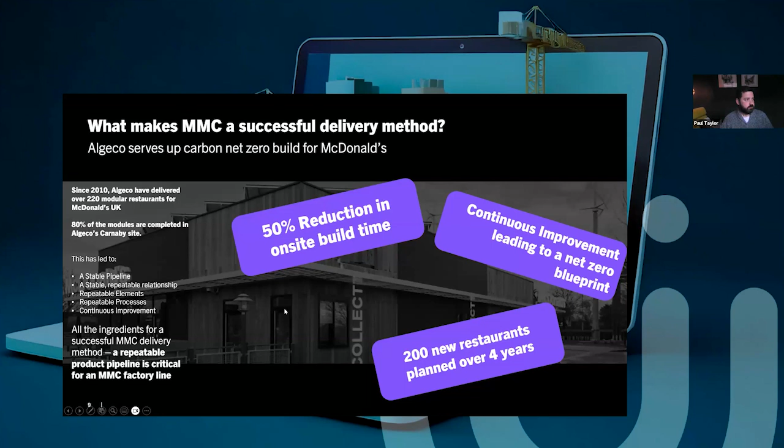So if that's the case, how can platforms help with that? Obviously I've been talking about platforms being a balance of repeatability and variability. If we look at that last example, repeatability is really important for MMC - repeatability in the factory line, in delivery methods. So that's how the product platform can help scale MMC.

So as you look at these three domains we talked about before - if you look at the demand domain, you're really trying to stabilize your pipeline and developing those stable relationships with clients and the supply chain. So you get a good grounding and foundation for that repeatable delivery.

When it comes to that develop section, when you're looking at the programmatic implementation and not just projects themselves, you can look at the repeatability across them and develop something that suits the factory line for MMC - development of repeatable solutions that can enable the successful use of a factory line.

And then we come to deploying projects as well - deploying projects that are configured with those repeatable MMC elements in mind. So if you've done the demand domain, undertaken that information to understand the pipeline, and developed a programmatic approach, when you deploy it your factory line will already be set up for those repeatable elements and can meet what the client wants. It can be amalgamated with those variable elements that are specific project-based client requirements, if that makes sense.

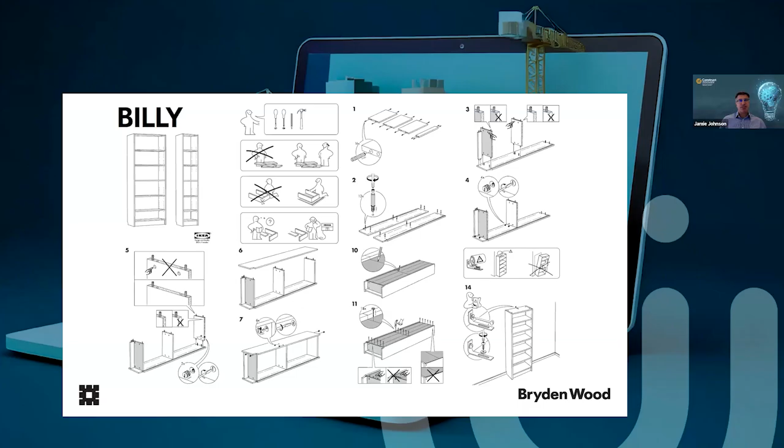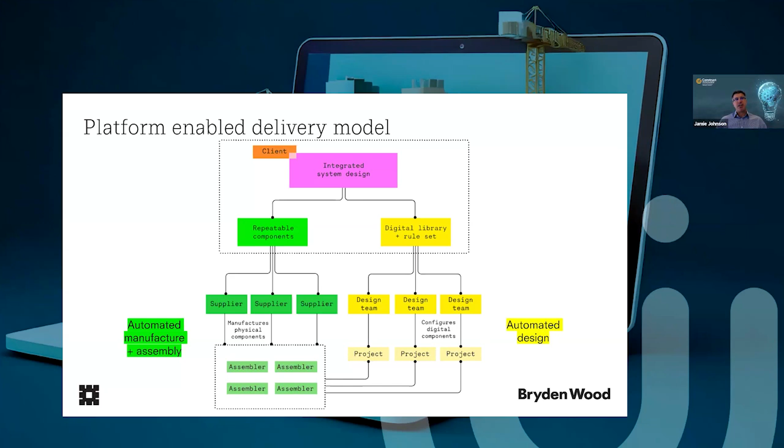So this is how we describe it. We say if you had a coordinated set of components and interfaces and processes, on the right-hand side, you could codify those quite easily as a digital library with configuration rules. Design teams could be configuring projects, so not designing a school from scratch each time, but configuring standardized solutions around classrooms and corridors, or Hospital 2.0 wards, inpatient things, as Paul's talked about. So you think of design as a configuration of standardized components with the project specifics on top. And on the left-hand side, you think about manufacture of standardized components assembled in a particular way, exactly as IKEA's done. That opens the doors to economies of scale, but also potentially automation in design and in assembly, which I'll talk about a bit later.

So this is why you do it. You do exactly what manufacturing's done, incremental gains, as Paul's talked about. You get a component, you optimize it, and you make it more and more efficient. You get economies of scale by doing it again and again. You get processes that continually improve. Whereas construction currently deals in constant reinvention, manufacturing is continual improvement. That's where we want to get.

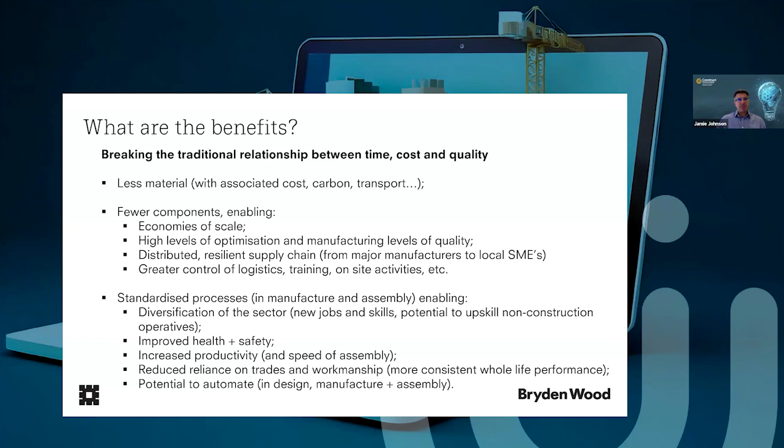That's how you get those incremental gains, and that's how you start getting into those 40, 50, 60% improvements in time and delivery, etc. So we've been working on this for a long time. We've now developed a kit of parts, but not just the components, also the tools, the workflows, and ways of putting these things together.

We would use exactly the same components across all of these sectors. By looking for commonality, we found there's much more typological similarity between education, resi, healthcare, etc. than people have traditionally thought. So we've been developing solutions which are good for all of these sectors. Where I'm going to show you an office deployment, you can imagine this deployed across the government estate, or certainly on large portions of it.

When Paul and I were working at the hub together, we did a piece of work looking across the government estate. We found that about 70% of the things that government builds could be delivered with the same kit of parts. So the potential scale of deployment is vast. This maybe explains that principle.

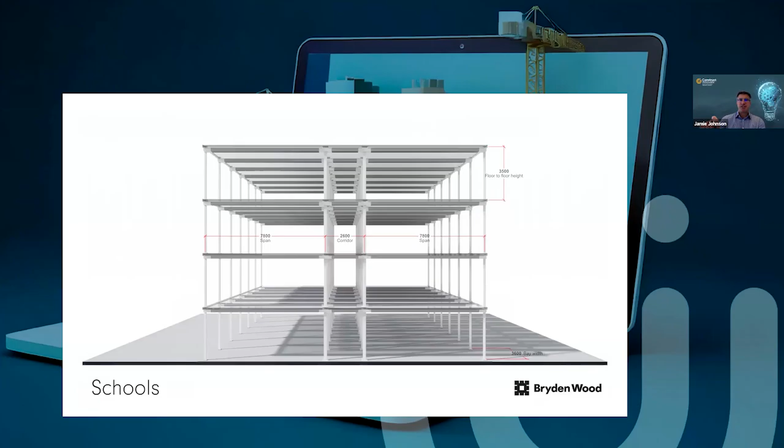So if you imagine the interfaces, like IKEA, between the columns and the beams in this instance are the same each time, you can imagine to an operative on site and to a manufacturer of the components, you're just making the same thing, carrying out the same process time and time again. Just by cutting the beam to a different length and the column to a different length, suddenly you get the same kit of parts deployed to multiple different sectors. And then the variability becomes the facade that you bolt on or the MEP equipment you put in place.

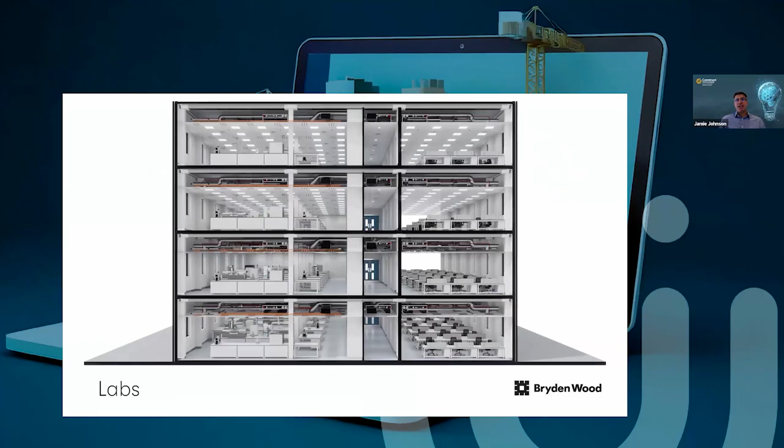One of the things we found through the government analysis work was that story heights were about a person height plus a bit. At that sort of height, you can get natural light about 8 meters into a building. That's why classrooms, hospital wards, and apartments are about 8 meters deep. So that typology of 8 meter deep space, central corridor, 8 meter deep space is incredibly common across sectors. If you develop solutions that do that very well, it's easy to imagine how just by tweaking some of the components, you can start building completely different sectors.

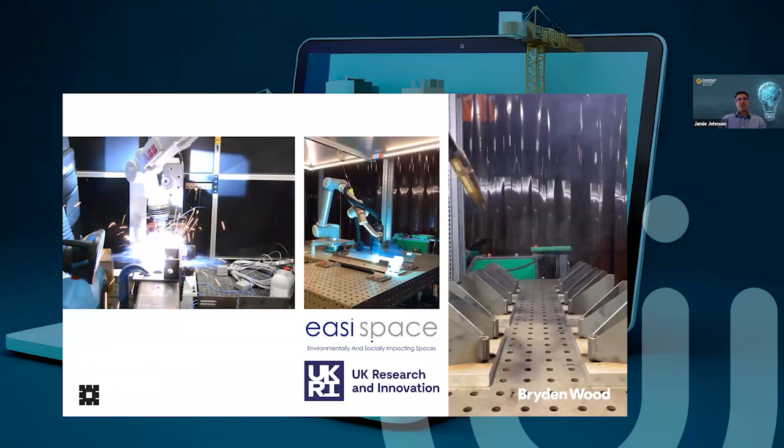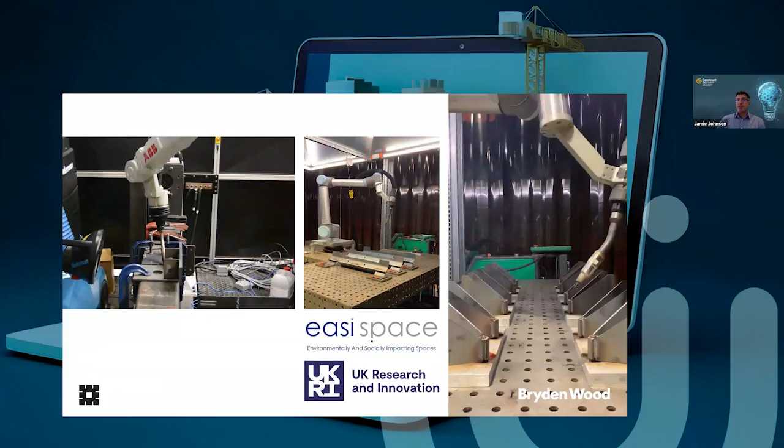What that then gets you into is once you have standard components and you're looking at massive repeatability, you can start to automate their manufacture. This was taking one of the sets of components we developed because we were delivering lots of them, so we could use robots to make them. For some components, we didn't even draw them, the file goes straight from our desktops to a robot that makes the components. They are then millimeter, sub-millimeter perfect. And suddenly you're not talking about construction tolerances, you're talking about manufacturing tolerances, and that opens up all sorts of benefits.

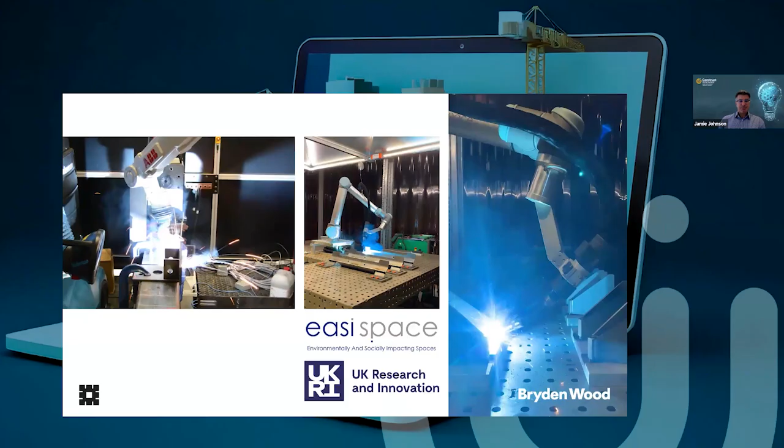As we know, lots of work on site is correcting tolerance issues or the issues left by the previous trade. This was a prototype, but this is how we built the project I'm going to show you.

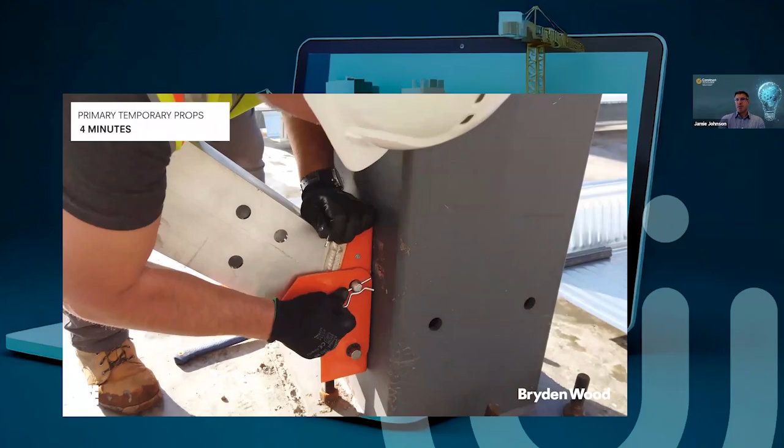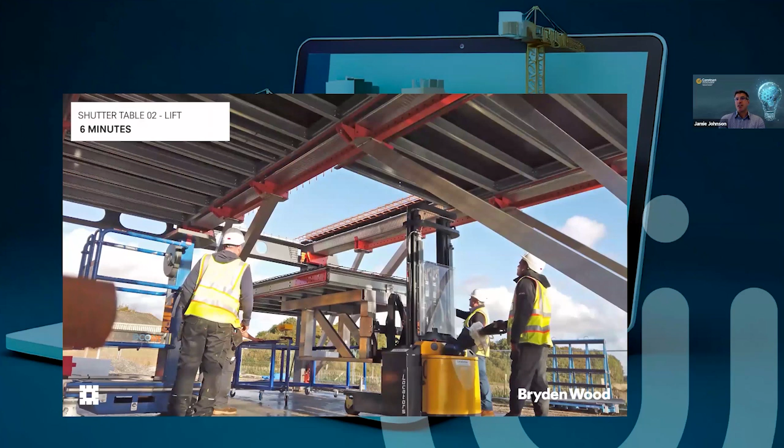This was looking at delivering one of these superstructure systems. So things to note, we're measuring things in minutes. Every task here is incredibly straightforward. If you watch this video several times, you could put this superstructure together. It's all incredibly simple. We only ever have a couple of operatives, 3 or 4 on site.

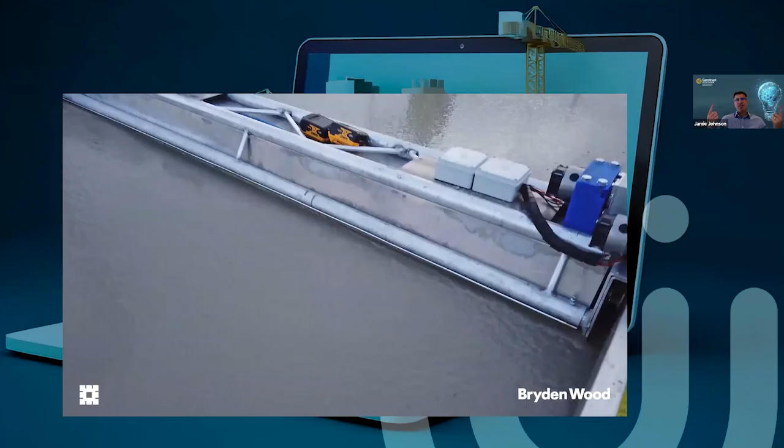This was looking at whether you could make an entire superstructure while never working at height. So you stand on the floor plate, you make the floor above you, then when that's ready, go and stand on that floor plate, make the floor above. You can see here we're using a handful of operatives, a little bit of automation, and delivering an incredibly accurate superstructure.

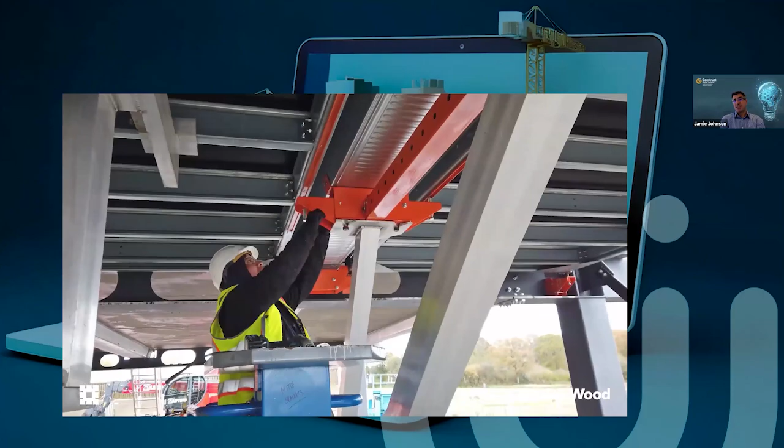On 9-meter structural bays, we were plus or minus 5 millimeters because everything was laser cut. You'll see in a second, all of the MEP fixing points were cast into the slab. So now, like a car chassis, you have this incredibly accurate superstructure that's ready to receive everything else as a kit of parts.

So this is how we delivered this project. This is a building called The Forge, for Landsec, who are the UK's largest private developer. One thing to note, this is incredibly site-specific. All of the step-ins, all of the way the building is shaped, is designed to absolutely maximise the volume you can fit within the planning envelope in London.

So again, absolute variability, as Paul's talked about, absolute standardisation at component level. We've designed a very site-specific solution that uses a kit of parts that was originally developed for the prisons programme, then proven relevant for schools, and in this instance a commercial office.

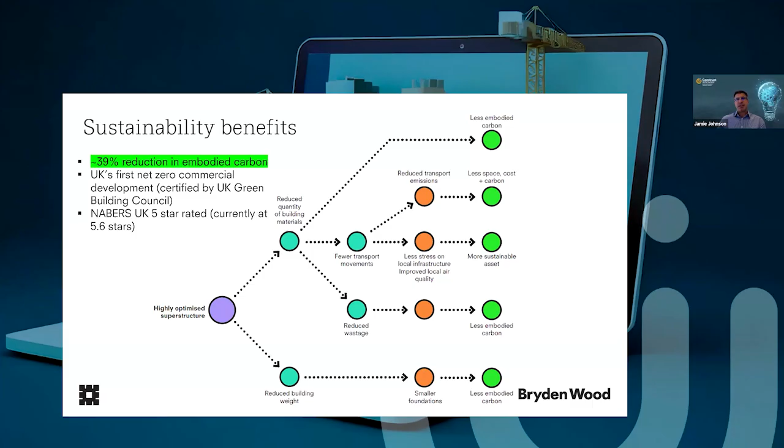This was actually the first net zero commercial development in the UK, with a NABERS UK 5-star rating, an international rating system. You can see we talk about chain reactions of benefit - because we had a super optimized superstructure, the building weight comes down, we have fewer transport movements, and we had virtually no wastage on site because everything's a kit of parts that comes together, with no cutting and shaping on site. We get multiple benefits through doing this, at a significant scale.

One key benefit was that we could really integrate all the systems together the way manufacturing does - like inside your phone or under the bonnet of your car, manufacturing does a very good job of integrating things. In a traditional office you get a slab zone, pipework zone, ductwork zone, cable tray zone, lighting, ceiling, finishes, and you end up with these wasted spaces.

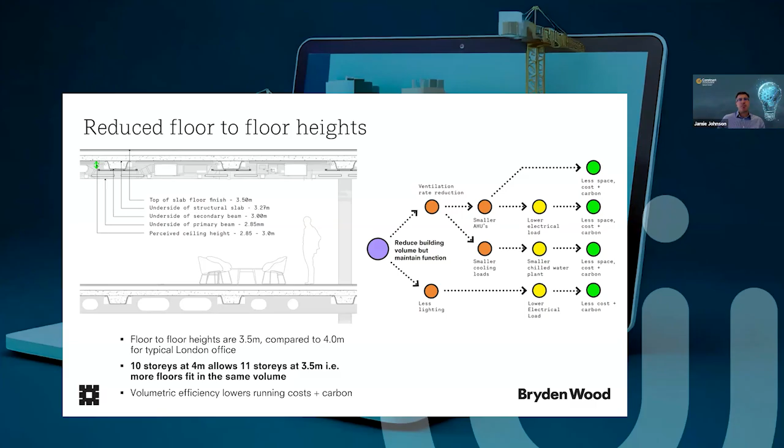One benefit was we could reduce the floor-to-floor heights down to 3.5 meters while keeping the ceiling heights at sensible London ceiling heights. For Landsec that meant you can get 11 storeys in what would normally be a 10-storey building. If you're a commercial developer, that's immediately a massive benefit - you get an additional storey and the rental income for the life of the building. That alone has a huge commercial imperative.

Because of the accuracy of that superstructure, we engaged the supply chain. They told us about 40% of the cost of a facade is on-site measuring, site surveys, shimming, masticing, bracketing - filling the gaps between the manufactured things. Facades have been industrialized for a long time, and when it hits traditional construction tolerances, there's a massive mismatch. Just because the facade was designed to go into the superstructure and they believed the superstructure was super accurate, we took 40% of the cost out of the facade.

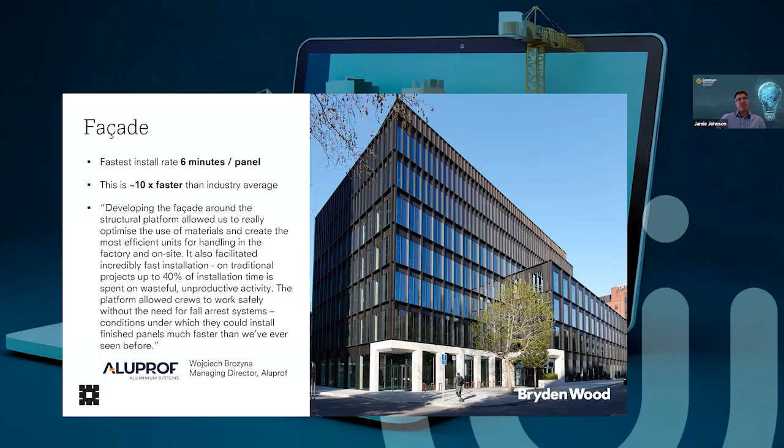You can see the install rates - because it was pre-engineered to receive the facade, they installed the panels about 10 times faster than traditional construction. Theoretically you could have clad this building in a week, but no one quite understood that at the start of the project, so they didn't gear up for it. We saw them do 19 panels in an hour and a half, then go 'we'll be back in 2 weeks because we've got to go make some more panels.' But now we know this, we can accommodate that moving forwards.

A similar thing happened with the MEP, because the superstructure was designed to have repeatable bays with a repeatable set of fixings cast into them. Our friends NG Bailey could set up bench tops, drop the MEP into the cassettes, stack those up in the factory, wheel them out, then wheel them into a truck and onto the floor plate. We had specially adapted forklifts that picked up 5, 6, 7 cassettes at a time, with fixing points already in there - no drilling on site. The team just locks these things off and moves on to the next one.

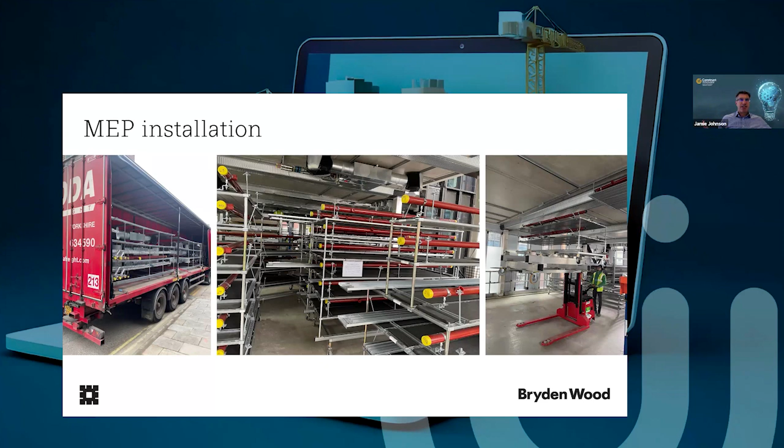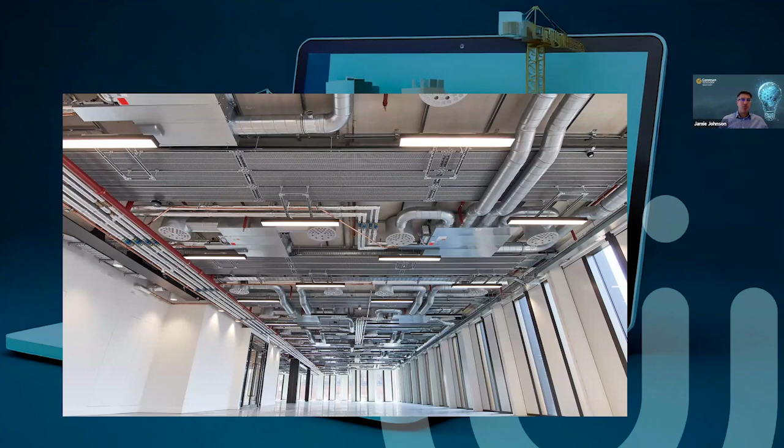So 2 operatives just go tearing down a floor plate, installing what would normally be endless trades and overlaps and all these sorts of things. Looks amazing, looks incredibly well coordinated. Everything was designed to be maintained and replaced, and we could put all of that sort of effort into the front end.

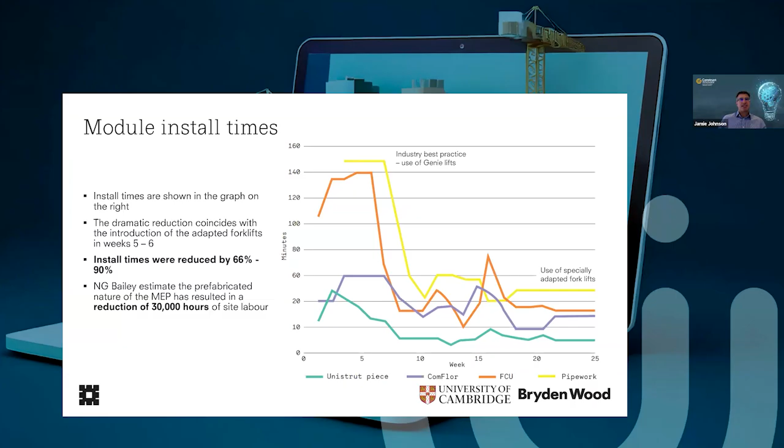And you can see the install time has absolutely collapsed once they got the hang of the forklift. So NG Bailey reckon they took 30,000 hours of site labour. Install times compared to industry standards absolutely collapsed.

And so suddenly you get these massive productivity and speed benefits. So if you read the full report, the Cambridge data was interesting. It said because no one had done this system before, there was sort of variability in the activity rates on site. They said, if you did the manufacturing thing and took out all the variability and just did like 6 bits of steel every day, without going faster than you've already gone, you would cut the program by 40%. So doing nothing differently with the same team, the same people, you could have built the building about 40% quicker.

So they use these things called flow line diagrams. This is looking at the activity and saying the time it took to go from ground to first to second, second to third. So without going quicker, if you just took out the variability, if you designed it in the way you would design a factory floor for building the building, you could build the same building 40% quicker.

So normally that's not beneficial because you're never going to build the same building again. But because of the whole platform benefit, that learning you could immediately deploy on Hospital 2.0 if they use something similar, or a schools program or a prisons program. So the benefit of this is that you can take learnings from one project and instantly deploy it on the next one. And yeah, this is how you start to get into that manufacturing mindset and change of thinking.

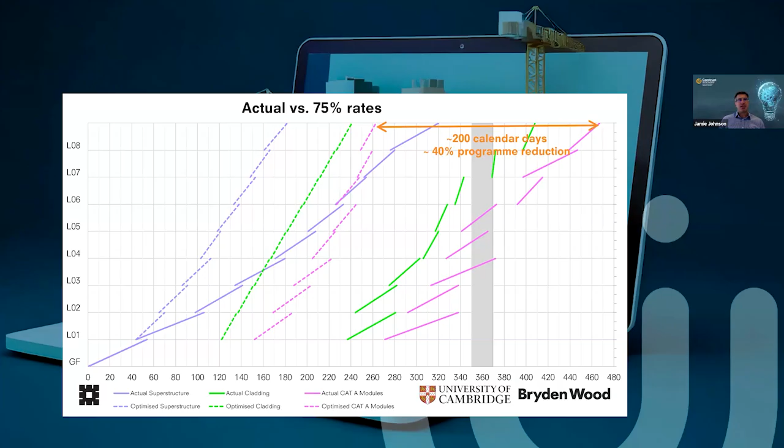Brilliant. Thanks, Jamie. That's fantastic, and showing it in action. And yeah, a building like the Forge, not just huge improvements in terms of productivity now it's done, but all the other benefits that people forget about as well. And then it wins lots of awards, not just saying, oh, this is really well built, really efficient to build, but also it's really efficient in terms of its energy consumption, reducing waste, and so on. So loads of, and great to see the guys from Cambridge there validating some of the results and so on from it as well.

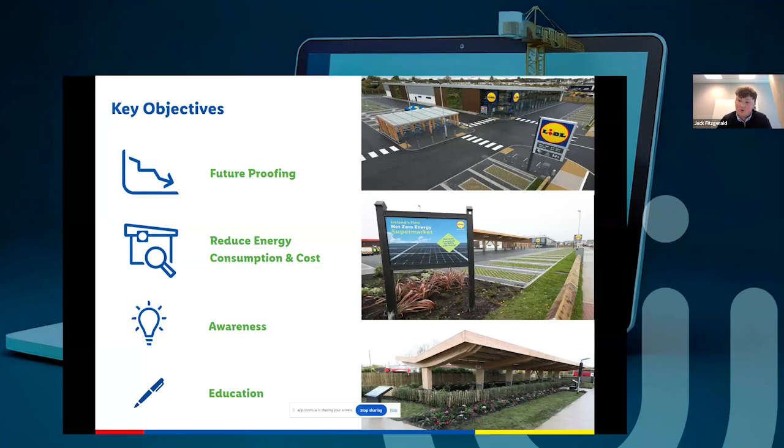So starting out, the project was probably over 6 years ago now at this stage. There was no definition for net zero construction in Ireland at the time. So obviously we needed to define what the scope of the project would be, and through our partnership with the Irish Green Building Council, they helped us to define this.

There were a number of different definitions for net zero construction through the years, through the World Green Building Council, or even most recently the UK Net Zero Carbon Building Standards. But the IGBC provided the most onerous definition, and this was the one that we wanted to target in this case. So this was all operational and embodied carbon - the operation from the day-to-day running of the building, and the embodied carbon through your building materials and methods.

And then the offsets, only for embodied carbon, must be genuine offsets. Some of the definitions through the years have allowed a wide range of offsets, such as the purchase of green electricity. But here, what we actually did in Maynooth was we retrofitted another store, say in Celbridge, which is nearby, with a portion of PV as well to make up the remainder of embodied carbon.

So in Maynooth, all the operational carbon is offset on site to our on-site renewables in the PV. And the vast majority of the embodied carbon is offset on site also. There is a small portion that was left over that, as I said, we actually offset through a PV retrofit within our own brand - so an inset, even in this case.

Like any project, it's only as good as the team that you can put together in order to achieve it. So the IGBC were obviously a key partner in this project, helping us define the scope and what we needed to achieve.

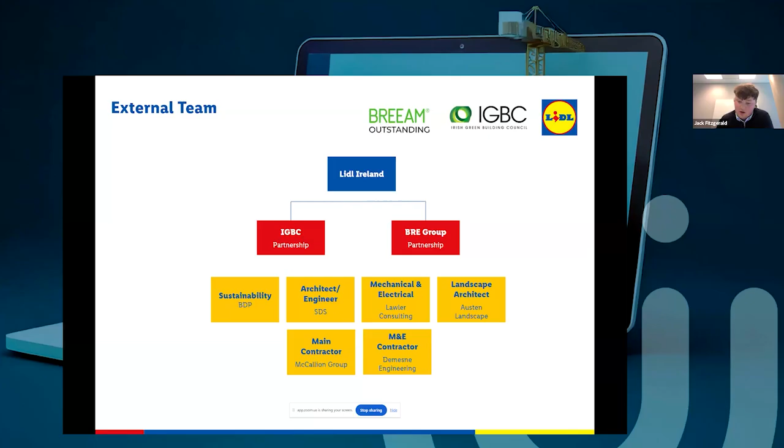So maybe just to start off with the embodied carbon. We obviously knew that we were performing quite well in terms of embodied carbon from our initial life cycle assessment, carried out based on a Lidl standard store. I'm using the UK net zero carbon building standards here as the benchmark, reason being the Irish targets are predicted to follow quite closely in suit. What we found was from our standard stores, we were already achieving beyond the 2030 target, just over 400 kilograms of CO2 in the standard store.

Through material selection and our construction methods in Maynooth, we wanted to further reduce this. We were able to reduce it by a further 26%, bringing us down closer to that 2040 target. In Maynooth, we were achieving just over 300 kilograms of CO2 based on all the changes we made.

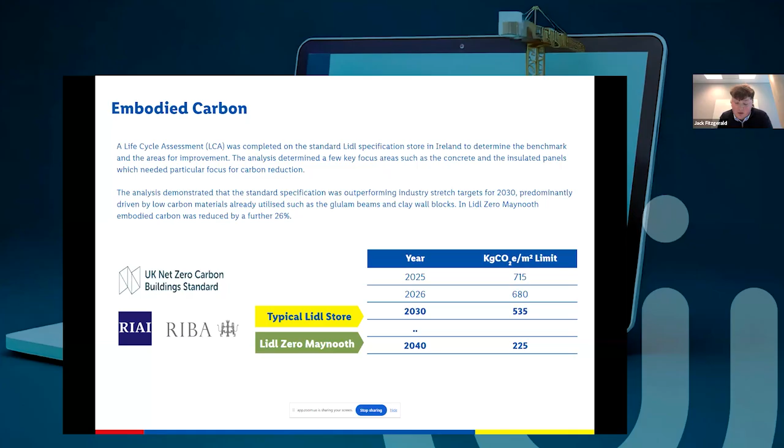The initial life cycle assessment we carried out through our partners BDP identified some of the key areas we had for improvement. Straight away, the substructure - your typical concrete slab, even your beams, the columns - we'd typically use our standard concrete here that has a portion of GGBS in it, but not much.

In Maynooth, through our supplier Ecocem, we specified a product using 50% GGBS materials in the concrete. This obviously has a massive impact on the carbon produced by the concrete in this case, reducing it by over 40%. What we also found was the roof and wall panels were a big hitter on our standard stores also.

Typically we use an insulated PIR panel. Through this project and our partnership with Kingspan, they were able to provide us a panel from their new lower embodied carbon range, and they actually used Maynooth as a pilot project to test this. The roof and wall panels through the LEC range were able to provide us with an 18% reduction in carbon.

We also looked at other items, such as the wall details, where we typically build in a Porotherm clay block. We looked at other options such as mass concrete or even going with an insulated panel from floor to ceiling, but we found that the Porotherm block had quite low embodied carbon in comparison to these ones.

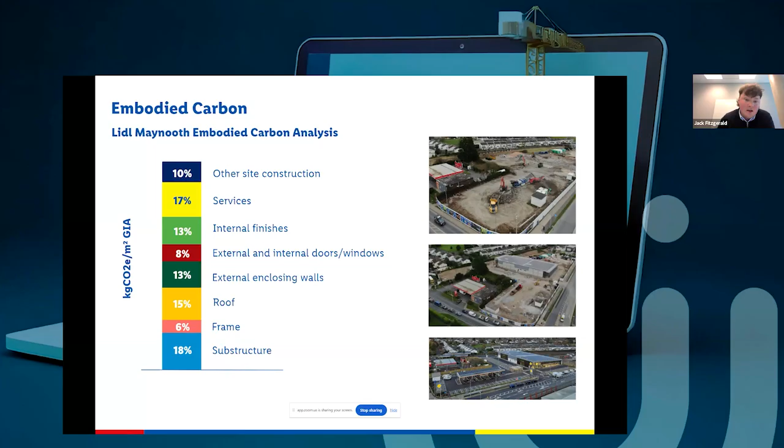So we looked at all these items in isolation, identifying some of the biggest hitters - the roof panel and all your concrete related items. We also looked at the roof structure, since 2016 roughly we've been including glue laminated timber roof structures. We looked at whether mild steel or even precast options could reduce the carbon here, but found they were already performing quite well, so we decided to proceed with glue laminate timber here also.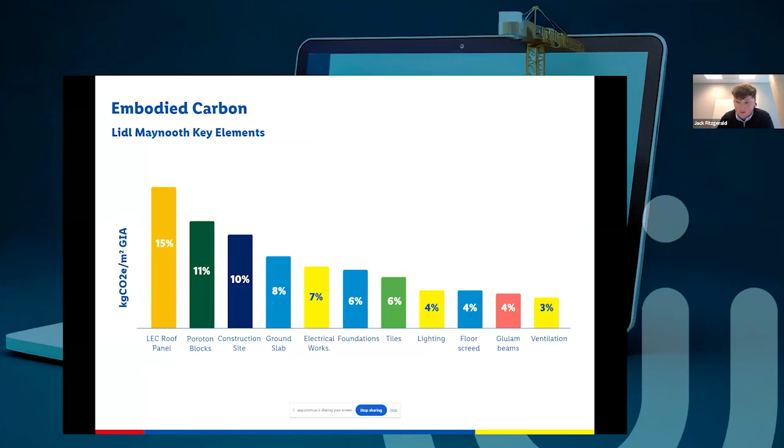So that was the embodied carbon piece squared off. We had a strategy in place. The next thing was putting a strategy together for the operational carbon.

Again, similar to the LCA, we managed to determine what the typical energy usage of our standard store is, and we broke this down into some of the key categories. Straight away, we saw refrigeration was the biggest hitter there, making up 55% of the energy consumption.

We also looked at lighting and what we could do here in order to improve it. So we've included additional daylight sensors within the store as well, so that lights will go up and down on lux levels depending on the daylight that the building's achieving at that time.

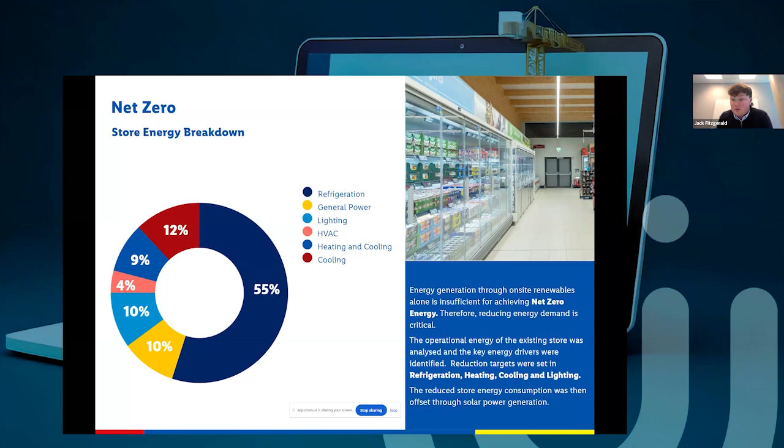And then also the likes of the heat and the cooling in the building. We looked at different systems we can use here as well in order for our standard system that we typically include, in order to reduce this.

So like I said, we had to figure out how we were able to achieve true net zero. Through our changes in specification to our heating, our refrigeration, our lighting, ovens, etc., we found we were able to get to a certain point with reducing the store energy usage only. Obviously then the remainder was going to have to come through our on-site renewables.

The solar to store was obviously the biggest one we looked at first. But the issue here was that wasn't enough to get us to true net zero either, because we were limited in the amount of PV we could install throughout the site, be it on the roof or on the canopies. So in Maynooth, we also decided to include a battery as backup storage here also. A portion of the solar will go to the battery then and be discharged as required.

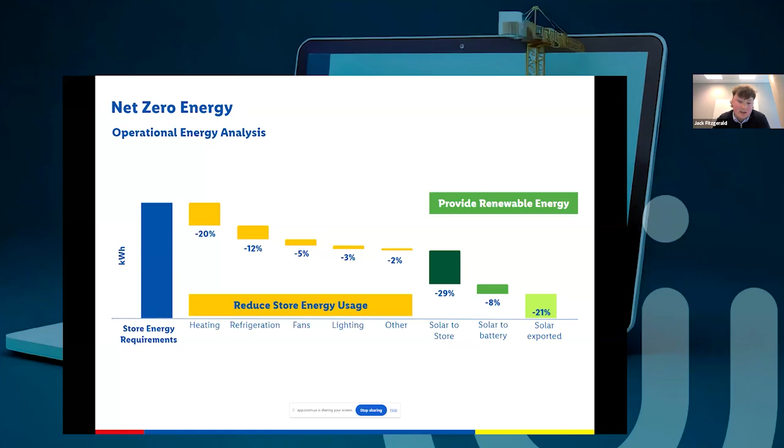And finally, this was the first store that we ever had to apply for an export license on. Obviously, in the warm, sunny summer months, there's going to be an excess of energy produced on the site. In this case, we want to export that back to the grid in order to achieve our true net zero.

Maybe then just to give you some headline figures to make it a bit more tangible, and what we were able to achieve. We found that 40 Irish houses was the annual energy saving in Maynooth. And then 142 tonnes of operational carbon were saved. This was versus a standard Lidl store, and we found it was the equivalent of 1,500 flights from Ireland to Spain annually.

Again, the embodied carbon through our LCA, the change through our first LCA to identify where we were at, and then through the changes in the materials and construction methods, we were able to reduce that by 26%. The energy consumption, again through the changes in our specification to the HVAC, the refrigeration, the lighting, reduced by 30%. The operational expenditure then reducing by 82%. Obviously, all these new initiatives and changes come with a cost, so there was an initial capital expenditure increase of 20% also.

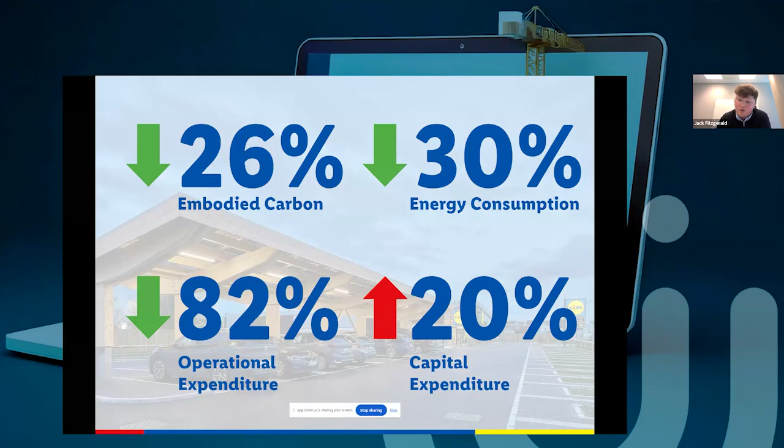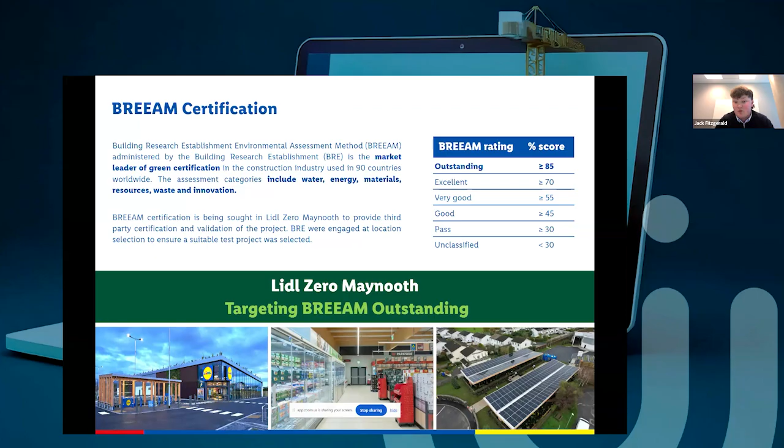So BREEAM, we touched on earlier on. Third-party validation and verification of this project was absolutely crucial for its integrity. So the reason we decided to proceed with BREEAM here is they're the market leader in green building certification in the country. So we've used Maynooth here now as our target, being outstanding, so achieving over 85% based on that tiered basis. We want to achieve the highest we possibly can.

The store selection for achieving BREEAM outstanding was obviously important. We have a number of stores that we build, retrofit, or rebuild every year, so we had to be careful in how we selected this. Maynooth itself had the store, it was there over 20 years before it was rebuilt this year. It was in quite bad disrepair, but we used this as an opportunity to reuse and repurpose some of the items and material on site. With BREEAM, there are a large amount of credits available in the transportation section. Because of its proximity to Dublin, being based on the commuter belt with public transport links, we were able to achieve a lot of credits here in Maynooth that we mightn't have achieved with some of the other stores on our plan that year. So those were the main drivers when choosing the store.

The store happened across a 37-week building program with 2 weeks fit out, so 39 weeks total. The old store closed on the 10th of February and demolition began that day. We reopened on the 6th of November 2025. There were a number of key milestones throughout the project: circular economy and reuse of materials in the initial demolition phase, recycled materials like the recycled concrete brought into site, lower carbon materials such as our new LEC range of roof panels and glulam beams, building services changes including new equipment, renewable energy like PV and battery storage, and biodiversity focused towards the end of the project as we came into the landscaping portion, all leading up to achieving net zero at the store opening on the 6th of November.

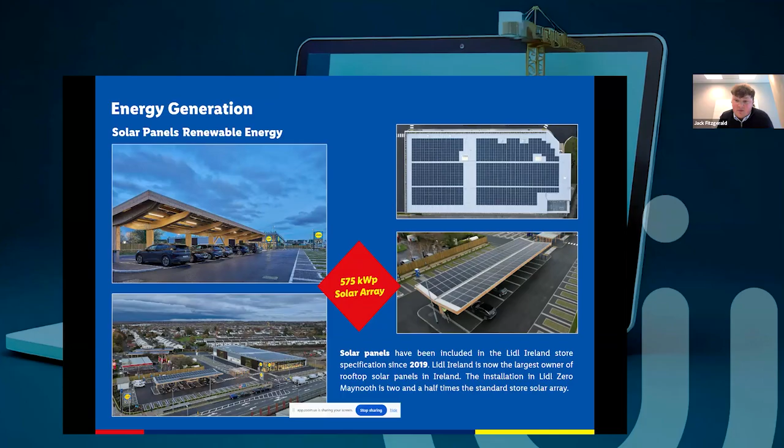Moving into some of the specific items we did on site. In terms of energy generation, we needed to achieve net zero through on-site renewables. We typically install 200 kilowatt solar arrays in all our stores as standard, but in Maynooth that wasn't going to be able to cut it. So we installed car park canopies in the car park, and there's also a community garden with 2 further canopies installed. This only got us to a certain point, which is where the battery usage and exporting to the grid came in, but it got us a long way there. What we installed in Maynooth is 575 kilowatts total, like I mentioned, 2.5 times the size of a standard store, and the panels themselves are the size of 13 tennis courts.

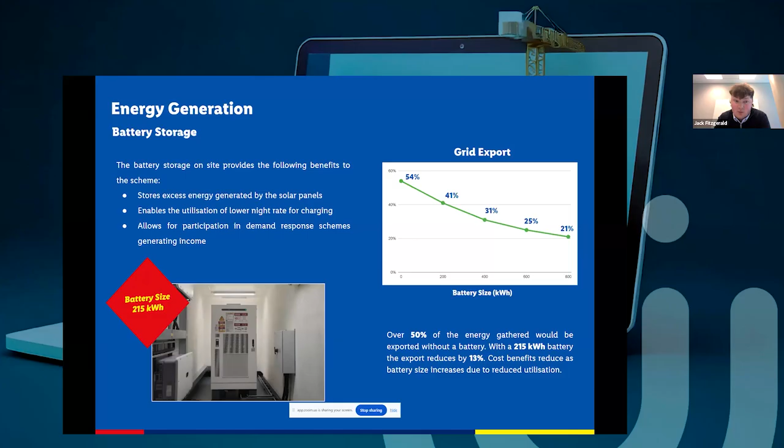The battery storage is a trial project for ourselves; there are very few, even within the Lidl brand, so it's something we're using as a test bed for the wider group. We found that in the months with more energy production on site, over 50% of that could be exported. We wanted to reuse some of that energy again, so battery storage was a suitable solution. We installed a 215 kilowatt-hour battery on site, which allowed us to reduce that export by 13%, putting more back into the store out of what we're actually producing on site.

Focusing on low carbon materials, the reuse of concrete and pavers: we wanted to focus on circular economy and reusing material from the old building, so we reused all the concrete and pavers, crushing them up and using them on site to make up the new fill for the new store. For recycled concrete, through our partnership with Ecocem, they provide us with a 50% GGBS concrete solution to reduce the overall embodied carbon, cutting emissions by up to 48%. The Poroton clay blocks I mentioned earlier were a low carbon solution versus other methods we looked at, and we increased the actual density of the block to reduce thermal losses through the building.

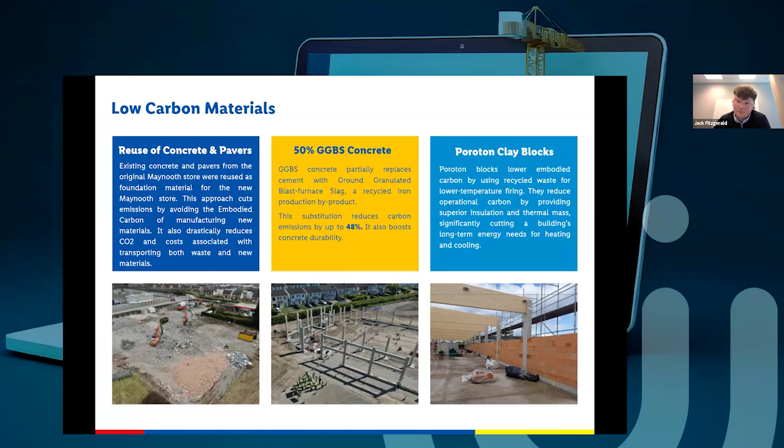Circular economy was a focus early in construction. We didn't want to dispose of everything off site and wanted to reduce the carbon footprint. From the roof structure, we dismantled it and kept the timber on site, fabricating it into furniture such as insect hotels, garden furniture, and bird boxes. We donated these to 4 local schools in the area, who have now made their own community gardens using the material.

We took the light poles out of the old store and donated those to RNLI in Buncrana Marina, where they're now installed. Then there's a local group called the ACRE Project, which provides men's sheds and women's sheds and community services to the Maynooth area. In this case, we actually purchased ancillary land to install a new community garden with 2 additional canopies.

This meant there was a lot of cut taken out of the project from removal of soil. So rather than just dispose of it off-site, we donated 7 tons of topsoil to the Acre Project. If you go out to site, or if you're ever at the Acre Project, you can see they have a number of garden patches where they've used the soil, including flower patches and vegetable patches. They also took the old palisade fence and made new chicken coops, which you can see in the bottom right, to keep their chickens safe.

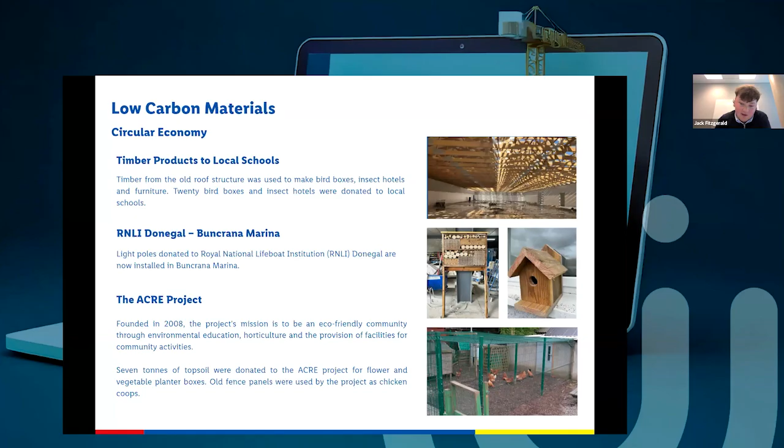Back to low carbon materials - I mentioned the glulam beams earlier. We install these as standard, and we continued to do so here in Maynooth, for the wall and roof panels where we installed the new LEC range. As the project developed, more suppliers and contractors reached out to us with their own products and solutions. Towards the end, when finishing the externals, we were offered a product using 70% reclaimed asphalt pavement for the binder and base layers. That was the final piece of the low carbon items that went into place.

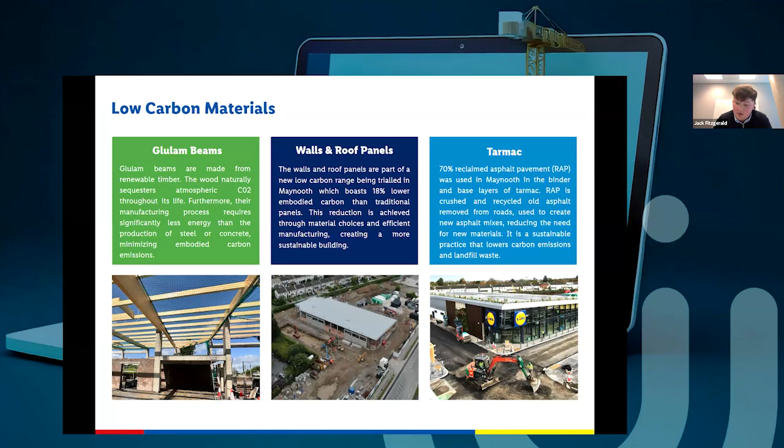The canopies in the trolley bay, similar to our roof structure, are fabricated using timber glulam, and they're quite visually appealing when you walk into the site. It's more something you typically see on the continent rather than in Ireland, but it was a key part of the project to achieve net zero and house all the additional solar PV. When it came to car park fixtures, the bollards we typically put around the car park to protect glazing or pathways, through our sister company Pre-Zero, we installed recycled plastic bollards on site. Funnily enough, they actually come from the plastic waste that comes out of Lidl stores, going back to Pre-Zero - so it might be the previous Lidl store that we're using these from.

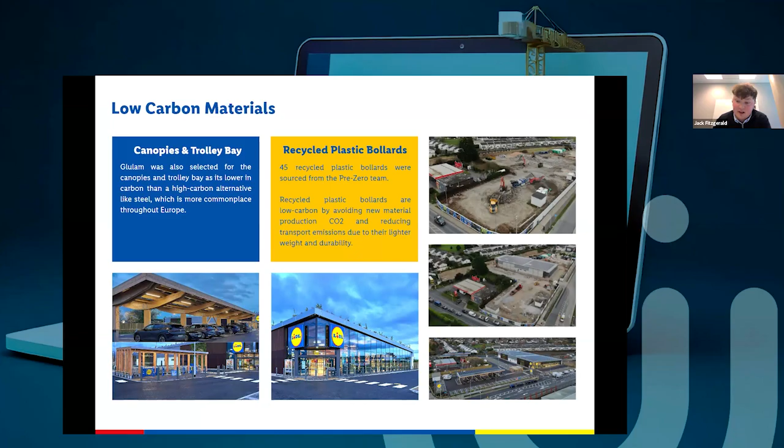For the impact on customers coming into site, we wanted to reinforce the biodiversity and sustainability image. So we included a living wall on site, which was actually linked back to an on-site rainwater harvested irrigation system, making use of the rainwater on site.

The community garden, as I mentioned, was on ancillary land we purchased to include the new PV canopies to achieve net zero. But down at the bottom of the photo there's a bus stop, and we opened up a pathway from there up into the site. We wanted to make something interactive for customers coming through the site - this is our biodiversity community garden, including bird boxes, insect log piles, and signage letting you know about the different plants and flowers, and the different animals or insects you might see on site.

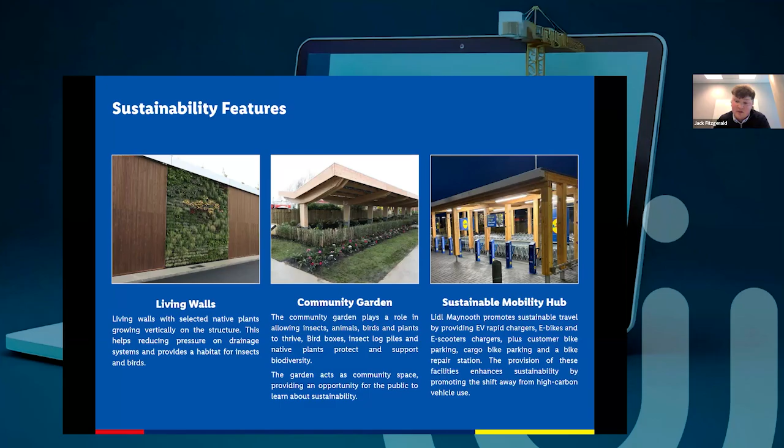Then the sustainable mobility hub - as part of BREEAM, we needed to focus on transportation and sustainability methods to achieve credits. In Maynooth, we have 6 electric vehicle parking spaces for cars with 3 chargers total, and 12 chargers available for bikes and e-scooters. We've standard bike parking spaces and cargo bike parking spaces for larger ones, so we're trying to cater to all the different sustainability methods that may appear on site.

Green car parking spaces was one as well. We had a planning requirement for sustainable drainage on this site. We've done permeable drainage, permeable tarmac previously, but wanted to do something different here to create visual impact when you come into the store. So we installed these green car parking spaces through a turf stone provided product. What they do is act almost like individual flower pots within each of those paving bricks.

The green grows out of them, and it all filters down into the attenuation tank on site. The planter roof boxes then, and the rainwater irrigation system - as well as the living green wall, we installed these planter boxes along the roof. They're not weeds, if anyone was wondering when on site in Maynooth - they're deliberately planted and fed through that irrigation system also.

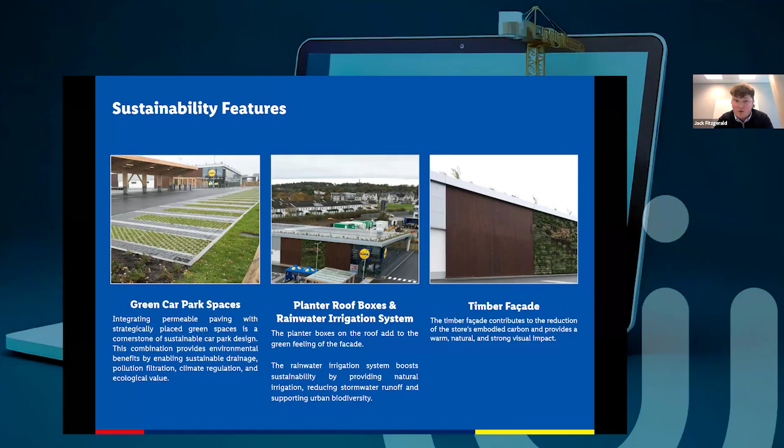And then finally, the timber facade was one as well. Not something we typically install, but again, we wanted to give that warm feeling when you come into the store car park, and further reinforce that low carbon impact.

Yeah, and then finally awareness - like I said, it was a big target point for us on this project. We wanted to raise awareness through our suppliers, our contractors, through IGBC, and further reinforce that Lidl sees themselves as a market leader when it comes to sustainability in retail. I think we achieved that through this store, and it was a very exciting project to be involved with. It's one we're quite proud of as well.

Since opening, we've found we've been achieving the targets set. Our energy consumption is more or less where we thought it needed to be. There was a bit of teasing out in month number 1, getting the new systems talking to each other that we wouldn't typically install - your refrigeration, your building management system, the HVAC - just getting everything up and running and performing as it should. But since then, we've been achieving our consumption targets, and our PV's been producing as well in order to achieve net zero. So all going well, in 10 months time at this stage we'll have achieved our net zero target for the year.